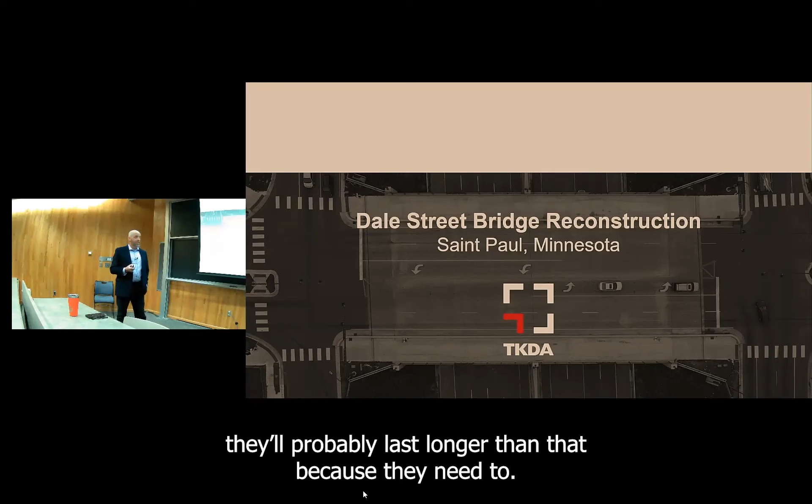St. Paul was my stomping grounds when I was a kid, running around in my youth, and you would learn about the Rondo neighborhood and the story of what happened there. To be honest, when this project came across my desk, it piqued my interest because this is where I call home. One of the things I really like about transportation projects is that you get to leave your fingerprint on your community for longer than you're going to be around. The bridges have a design life of 75 years, though they'll probably last longer because they need to. I was really interested in this, not only because this is where I grew up, but because Rondo has such importance in St. Paul, largely due to the community there that kept the story in the news. But to be honest, what I thought I knew at the time I started the project was not at all the full story.

This project was really devised by Ramsey County, who was the lead. To be frank, we've all driven down 94—they're all tight diamond interchanges. The ramps are really tight to the bridges, and a lot of them functionally don't operate very well. This was a major one the county wanted to replace. So the bridge was fine, but functionally it didn't work very well. Ramsey County led the project, and obviously since it's in St. Paul, they'd be involved, and MnDOT would be involved as they're actually the owner of the bridge.

Of course, we had to deal with the neighborhood groups—there's two of them, Rondo Avenue Inc. and Summit University. Blue Cross Blue Shield was involved; they donated some time and money to the project. And then Springboard for the Arts, which is a nonprofit for artists—I'll get into why they ended up being part of the project.

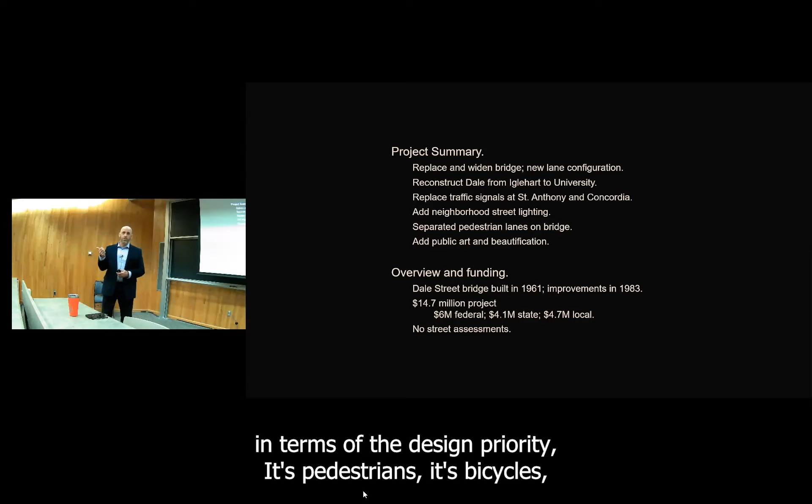Like I said, the scope of the project was really just to make that crossing and the signals more functional. That was originally the intent—you'd add some lighting—but in the end, what we ended up doing was really try to create a better environment for pedestrians and also for mass transit and things like that. When the county looks at their priorities for what they're going to design to, it's pedestrians, then bicycles, then mass transit, then vehicles, and then freight traffic, basically trucks. So as such, we needed to improve the pedestrian environment here.

So what's really unique about this project—when we got into it, I won the job with the county; they put the RFP out in September of '15, we proposed on it, and we were successful in winning the job.

And so then we got into starting off the public engagement part. This part of a project, public engagement, has changed drastically over my career, even from when the original bridge was constructed. In a way, when it started, it was not so much check a box, but you'd have your project and then a couple meetings. You'd get a church basement or a community center, put a layout up, some poster boards, and folks would come in and give you comments.

Then you would take those into consideration, and you'd do it a couple times. You'd do it initially when the project was starting, just to get some initial feedback. You would then come back later, once you've gotten that feedback, and put some layouts together, multiple, and get feedback on that. Ultimately you'd present, on the third one, what you were going to do in the project. In the first one, we did just that - we went in and put a layout of a concept down, and I'll show you in a bit what that looked like.

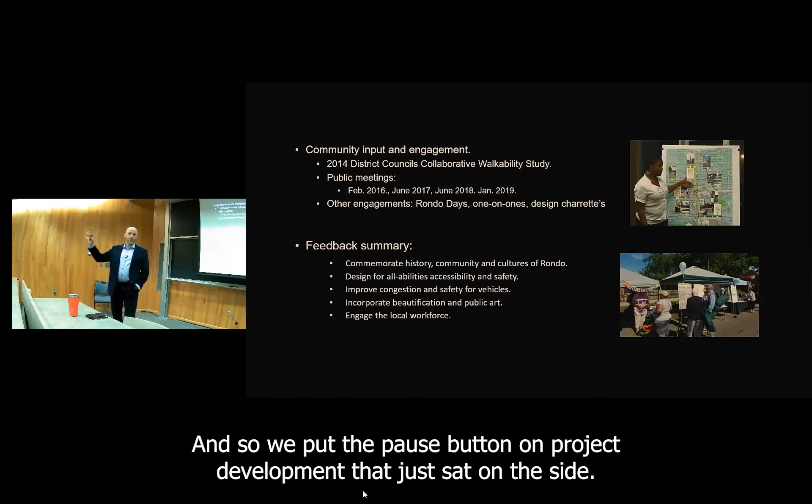But the feedback we got pretty quickly was, you need to slow way down. We're not ready to even start talking about options here. We need to just start talking. That was an eye-opener for us. So we put the pause button on project development - that just sat on the side. You can kind of see some dates there: '16, '17, '18, '19, we had open houses.

We would start going to Rondo Days, which is a big community event in the neighborhood there. And then we'd do one-on-ones - we'd go meet at people's houses, like a smaller neighborhood group, for a street or something. We'd go into their house and just start talking.

And then eventually what we started doing was design charrettes. What do you want to see? What elements or features of this project are you most interested in seeing? Some of that is really difficult for someone to express, because we're transportation professionals - we kind of know all the various things you can do reasonably. But they may not be as familiar, though they know kind of what they'd want to see.

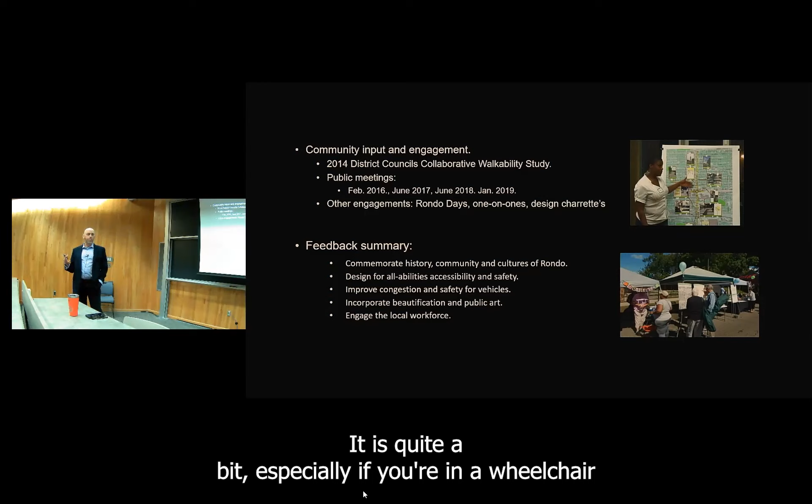That bridge that was there had multiple lanes, and like I said, it was a tight diamond - really tight. We've all been in intersections like this where people run the reds or just kind of keep flowing through. There's call it a hill, but because of the way the grade crossing was, there was a steep grade down to the north as Dale went north, actually a bit above 8%. If you're familiar with ADA requirements, the max grade is 5%. You think 3 to 5 to 8, that's a 3% delta - that's not that much. It is quite a bit though, especially if you're in a wheelchair, or if you're older and trying to negotiate walking down a steep slope, especially in the winter.

So when we started having these meetings, we got a lot of this feedback: we want a better pedestrian crossing, we want it to be more open. The current bridge had 5-foot sidewalks. It was built at the dawn of the interstate, and back then it was really a utility - you need to get across the bridge, 5 feet's enough, good for everyone, right?

And so they wanted a wider sidewalk, but sidewalks at the time when we started this project, the biggest we'd ever build would be 12 feet. That kind of came around when I started my career in the 2000s, and that was a big deal to go from 8 to 12 feet. They wanted bigger than 12.

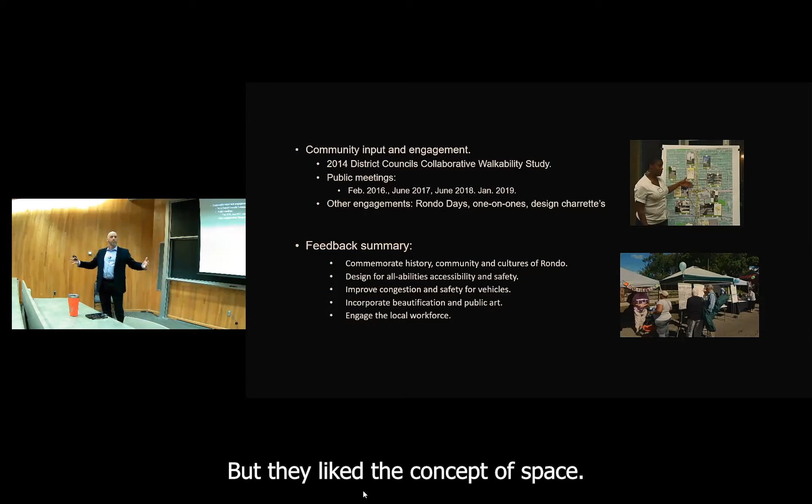Oh, okay. And I think we've all heard of the lid that they're talking about. They brought that up, but everyone recognizes that didn't fit within this project. That was something else, but they liked the concept of space. So that was one of the things.

So you can see kind of the feedback summary here. And one of the things that came out too was they wanted something unique about the bridge. They couldn't put their finger on it, but essentially somehow draw our neighborhood into the aesthetics of the bridge, our history into the aesthetic of the bridge. I'm a bridge engineer.

I'm not an artist. I don't have that sort of creative mind. All of the folks I was working with at the county are engineers too. So we put a lot of thought into that.

What we ended up doing was reaching out to an organization that works with artists. They're a nonprofit that needs some seed funding, but they can connect artists with projects, whether transportation, industrial, or something like Ecolab looking to do something with their space. It's just something to help get artists into some field of work.

So what we did is we worked with Springboard for the Arts, and we interviewed 12 different artists. St. Paul put in $10,000, Ramsey County put in $10,000, and Blue Cross Blue Shield put in $10,000 too. So we had $30,000 that we could use to hire some artists.

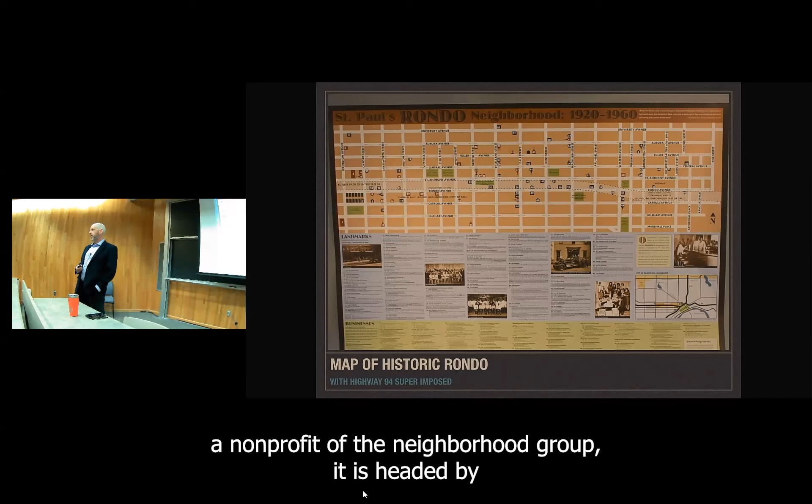Rondo Inc is an organization, a nonprofit of the neighborhood group. It's headed by Marvin Anderson. His childhood neighborhood here was before Interstate 94. He had this poster at a lot of our engagement meetings, and what this shows is where 94 went through the neighborhood.

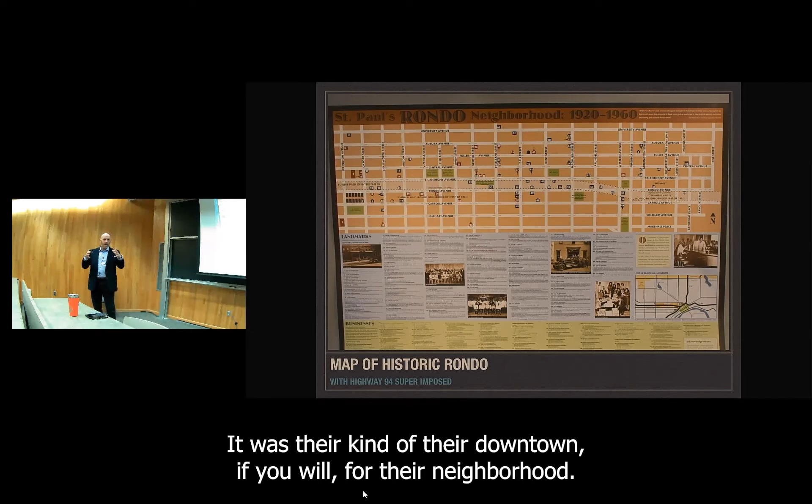You can see by the lighter line where it went through, and how the neighborhood was before. What's significant about Rondo is that these interstates went through a lot of different neighborhoods. What it did when it went through Dale is Dale was the center of the African-American neighborhood in Rondo. It was kind of their downtown, if you will, for their neighborhood. They had some shops there, they had some gathering places there, and this project really bisected that whole thing, kind of wiped it all away.

For those that don't know, 94 had two corridor options. Obviously the one they built on, but the other was more up by Energy Park Drive, which was more commercial, industrial, with different economic value in the minds of those that made the decision. But 94 went right through the neighborhood.

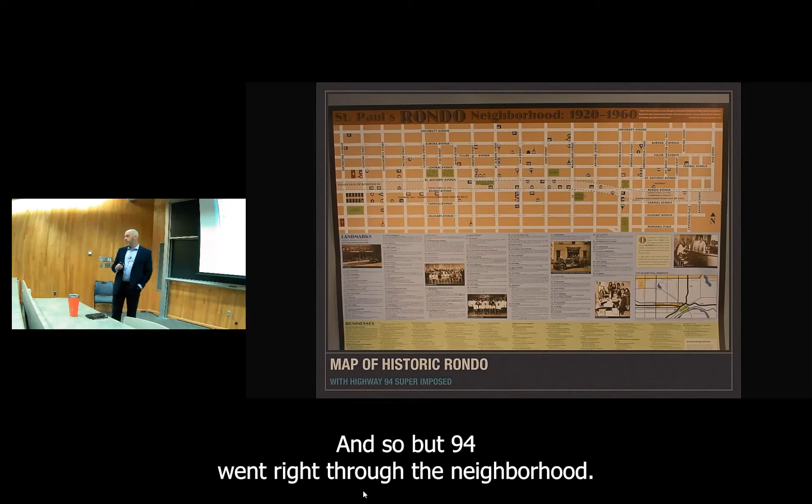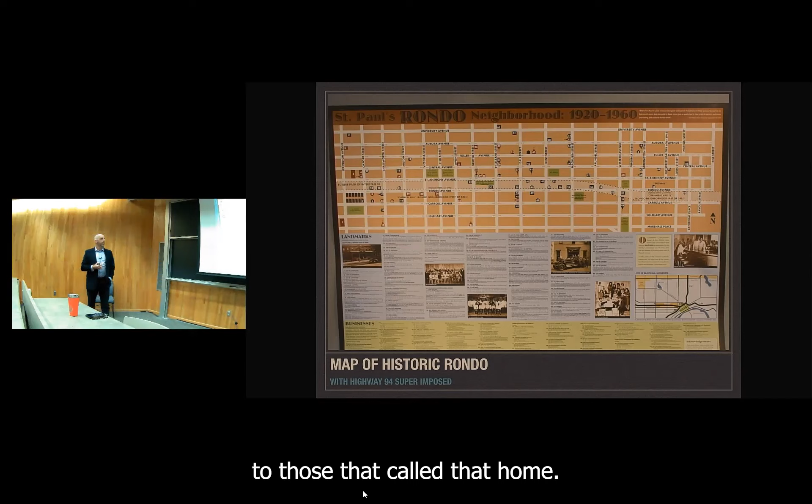If you take a look at what this map is, it's a grid of a neighborhood, and 94 went through it. This was pretty significant. If you took the time to talk to Marvin about it, read all these different points he has identified, you get a better vision of what happened and how deeply hurtful it was to those that called that home.

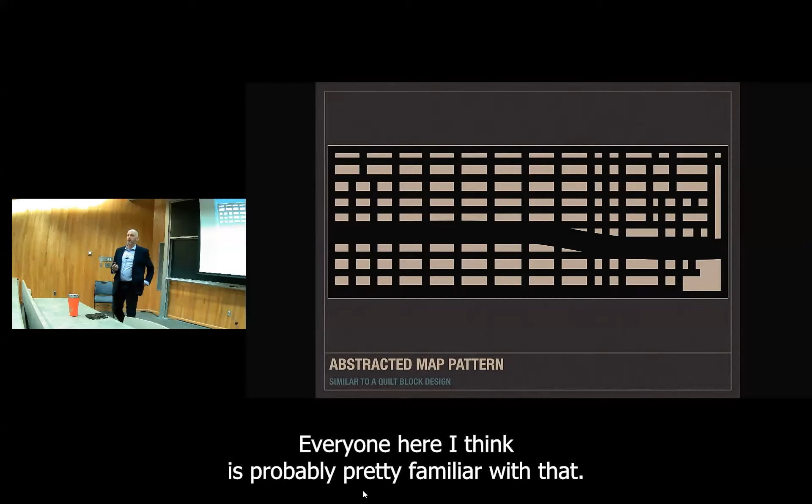We went and talked to a formliner supplier and brought this image in. You can't do a formliner where you have individual squares. What they were looking for was a 3D nature to this, where either the streets were inset or the neighborhood blocks were inset. But somehow, if this was 0, this would be -1 inch type thing.

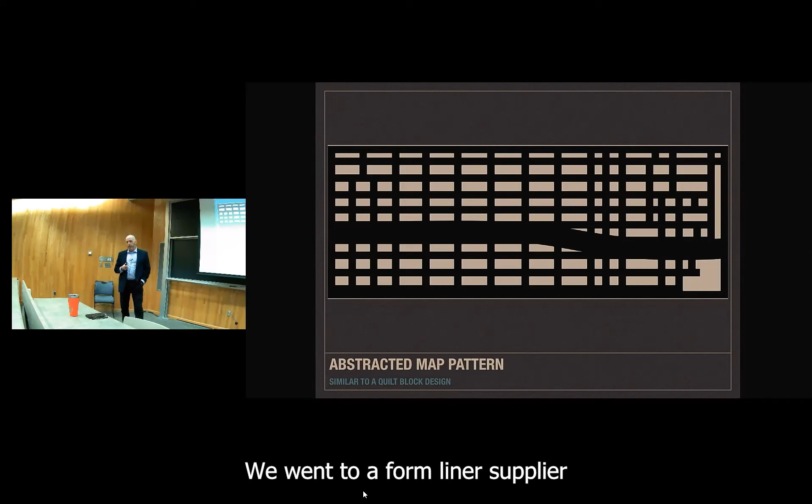We went to a formliner supplier down on West 7th Street in St. Paul and talked it through. There's a way that they could make this out of a plastic-like material with a CNC machine. That seemed pretty reasonable. So what we did with this is we nailed it to the inside forms of the abutment, the end of the bridge. There's a large face of concrete there.

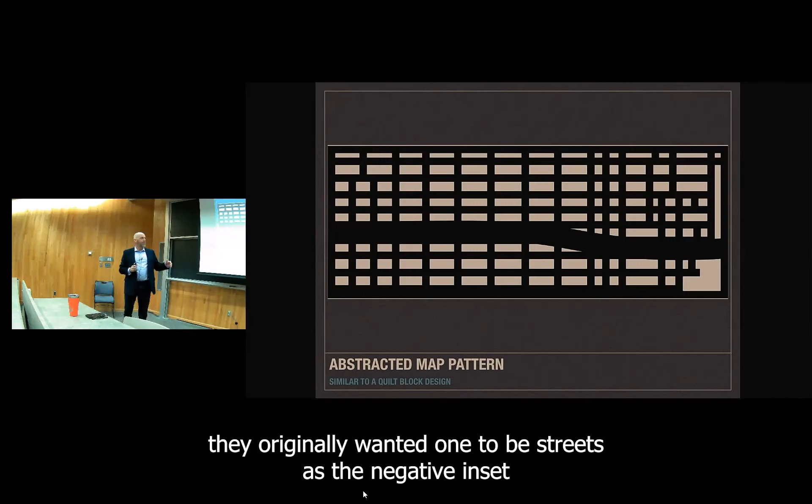So what you see when you go through there now is this on the face of the abutment. They originally wanted one to be streets as the negative inset, and then on the other abutment, streets be the outset. The idea there was that they could come together and lock together.

Cost-wise, couldn't do that. And the artists were incredibly good because they had these ideas. I had to get it into a form that was one, constructible, and two, economic, and three, you can't call it art because federal money can't pay for art. So it had to really be aesthetics.

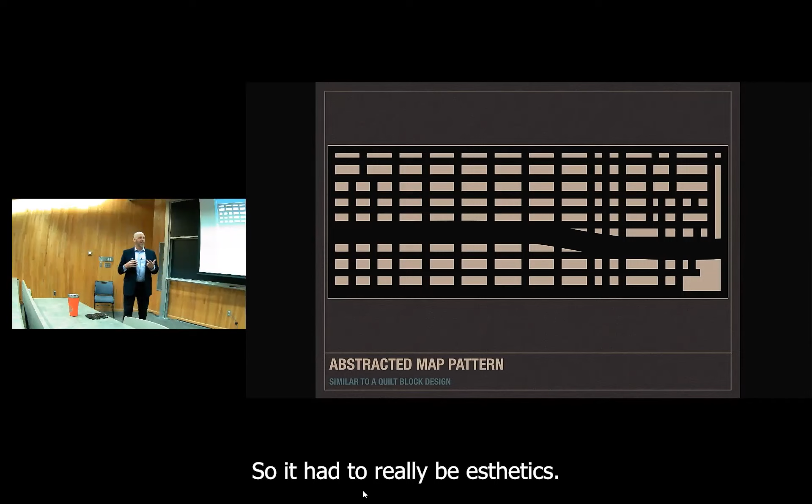So at any rate, to save on money, we made one form and we reused it everywhere.

When we were done with the job and doing the grand opening, some neighborhood folks were there and they were looking at it and they're like, is that the map of the neighborhood? And I said, yes, it is. So, bringing these elements into it. This is our neighborhood. Yes, 94 went through it, but this is our crossing was kind of the emphasis there.

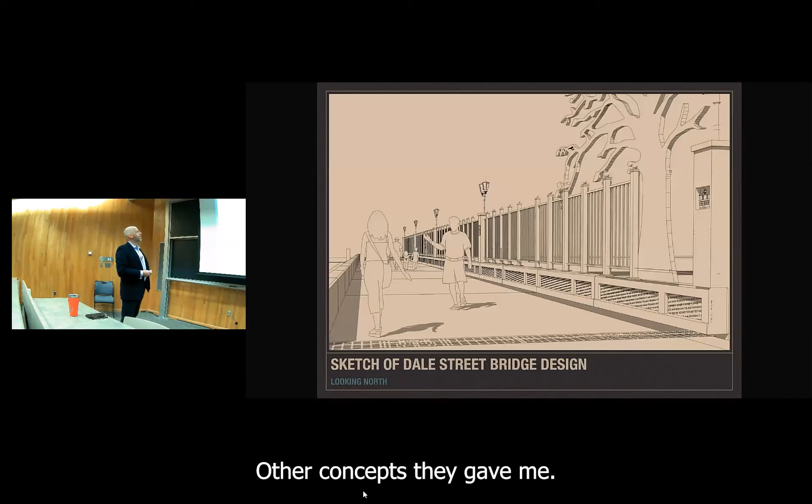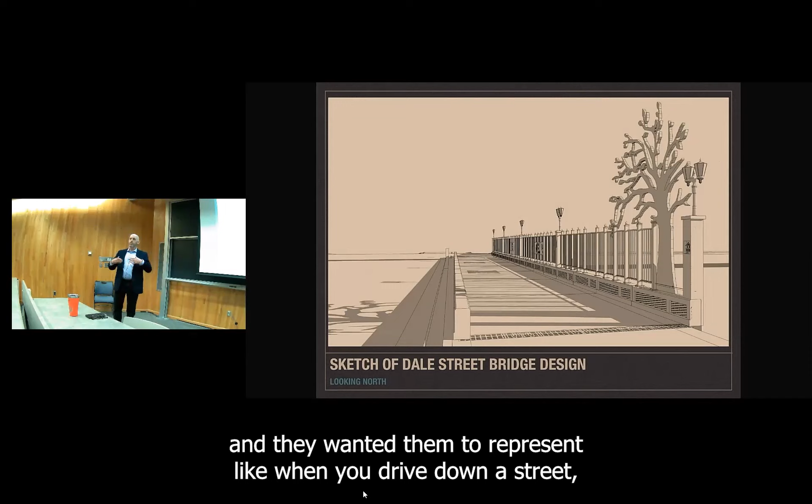What they wanted with the tree, they wanted metal trees, and they wanted them to represent like when you drive down a street in a neighborhood, there's a canopy of trees. They wanted to artistically give the impression of 94 having the canopy of trees over it, again bringing the two sides back together.

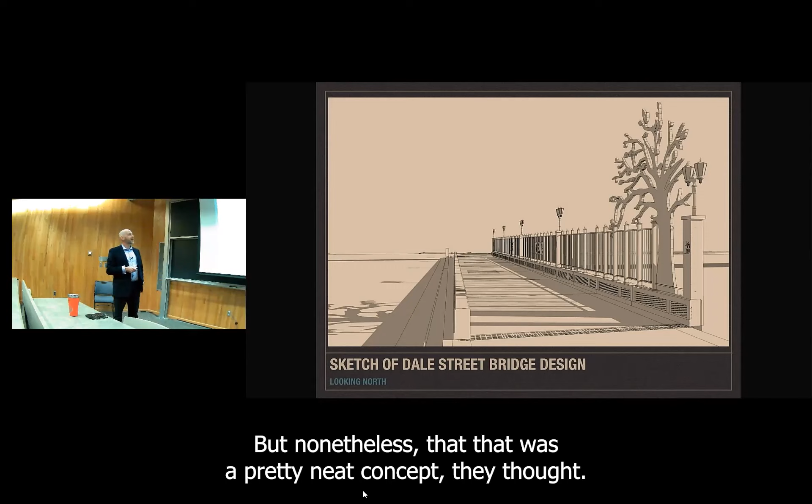I said, how tall are we thinking for these trees? And they said 40 feet. And I said, well, we got to scale that down a little bit. So eventually we landed on around 18, 20 feet, which I said, well, why don't we go for the height of a street light and then figure out from there. I still didn't know what we were going to do to make that happen, but nonetheless, that was a pretty neat concept, they thought.

And so they were giving me these ideas here. Here's another look at it when we put it into CAD. But one, how do we do this? How do we pay for it? And how do I try and make it constructible? That was a big part of the work we had to do.

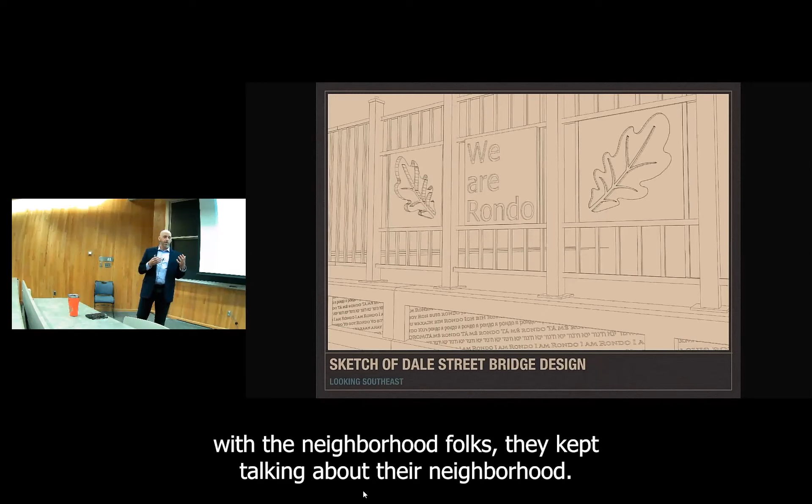Another thing that they wanted to do is We Are Rondo. When they were doing that engagement with the neighborhood folks, they kept talking about their neighborhood. We are Rondo. This is our neighborhood. You can put a freeway through it, but it's still ours. And so they wanted somehow We Are Rondo into the railing.

When we were looking at that, you initially look at it and go, well, if that's going to be cut out of steel, the E's don't work, the A doesn't work, the O doesn't work, right? So that was the challenge there, how do I do this. And then they wanted to do these leaves, oak leaves, again with the trees, making it as if the rebirth of the area, right?

So if you look at that from a constructability point of view, we have some challenges on how that would work. You could see a kid coming up and just pulling on that and bending that piece of metal out, and then we got a problem. But that's the concept I have to work with.

Down here, I have another slide for this later, but what that is, We Are Rondo, I Am Rondo, written in 13 different languages. And the 13 different languages represent the 13 different ethnic groups that call Rondo home right now. So that's pretty cool, I like that idea. Probably could do something with Formliner and CNC to make that happen. Not entirely sure, could get expensive, but I like the idea of it.

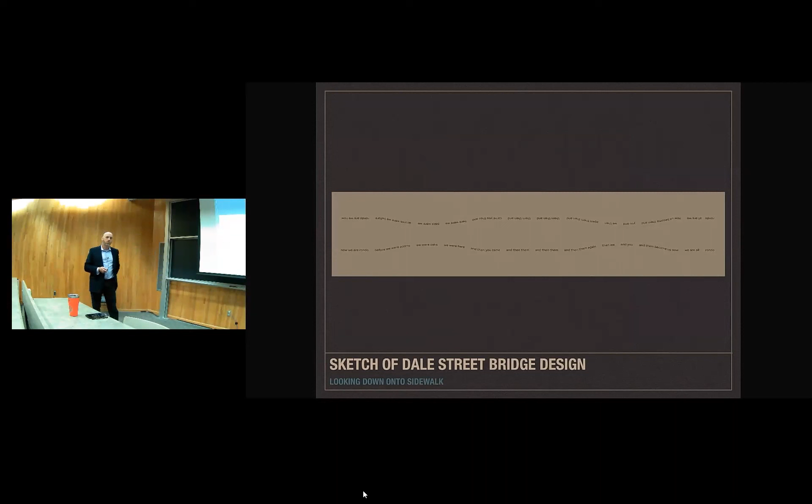One of the artists is a poet, and she wanted to write a poem that would get placed into the sidewalk of the bridge. The way she wrote the poem was that depending on what direction you were walking, you could read the poem from both directions, and it kind of had a different meaning. So literally this poem right here is the inverse of that one right there. An incredibly cool idea. As I'm sure a lot of folks here know, MnDOT is particularly sensitive about their bridge decks and putting any sort of imperfection into it, and that impacting the life of the bridge. But nonetheless, okay, we'll see what we can do with this and where we can put it. But I thought it was a pretty interesting idea.

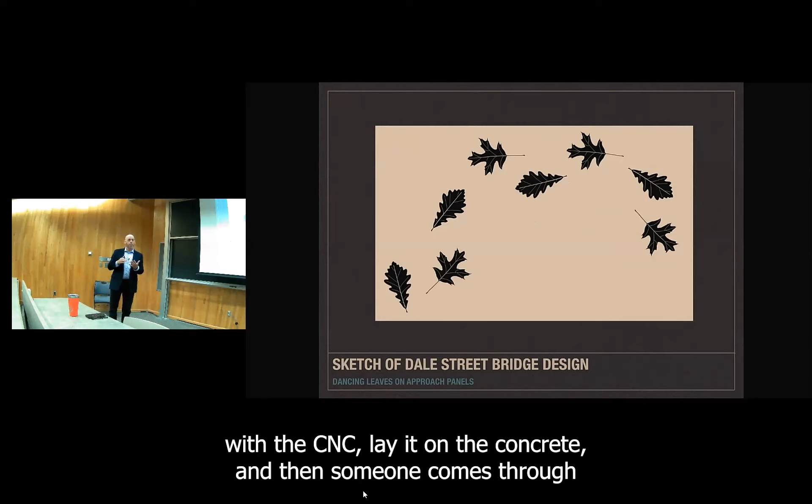These right here, and including the poem, there's a lot of detail here, right? Like they got the spine of the leaf with kind of the veins of the leaf going out. Obviously couldn't do any of that, but we did the outside image. What we ended up doing is 3M has this product that you can cut out with a CNC, lay it on the concrete, and then someone comes through with a sandblast and blasts it into the concrete.

Obviously, that's a one-time opportunity if you're sandblasting. So we had some panels poured off to the side that we were going to demo later. But we laid these out, and the laborers... I'll back up really quickly. This project was incredibly rewarding to work on for a number of different people, the laborers included. It was different, unique work, for the same reasons I love transportation projects. They liked this as well.

And so they sandblasted it. They spent time trying to make sure they were doing it right, but the form is only good one time. So they had rolls of this stuff for doing these leaves. Had to figure it out. And so in the approach panels, which is the concrete segment of pavement prior to the actual bridge, in the sidewalk area, are the leaves doing the Lindy Hop.

And then for the poem on the bridge deck, this was a pretty neat experience. MnDOT's incredibly sensitive about their bridge decks. They don't last very long, our environment is really tough on them, so we want to keep them as pristine as possible. When I was talking to the bridge office about putting a poem on the bridge deck and sandblasting it, they were remarkably good to work with on that.

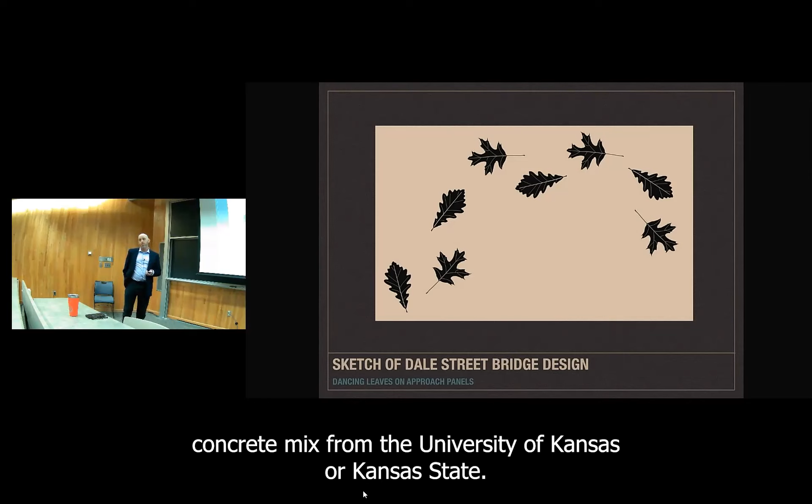What we ended up doing is using an internal cure concrete mix. The University of Kansas or Kansas State, I don't know which one, was working with MnDOT a lot on this mix, and MnDOT had used it on two projects before, one where it went well, one where it didn't go as well. But they wanted to give it another try. They felt the mix would deliver the resilience of the deck they were looking for, yet allow us to do the sandblasting.

As many of you know, we put a lot of fibers in concrete now, and they do an amazing job producing a great bridge deck, but they're fuzzy when done. You get all the fibers, those wear off, but that wouldn't allow sandblasting, it would interfere. So we did this internal cure mix instead.

I was involved during construction as the construction administrator, and we brought up the folks at the university who were working on the mix. We did a pre-pour and talked about all the different variables. It's a very sensitive mix - you can't just add water like a lot of contractors like to do to make it easier to work with.

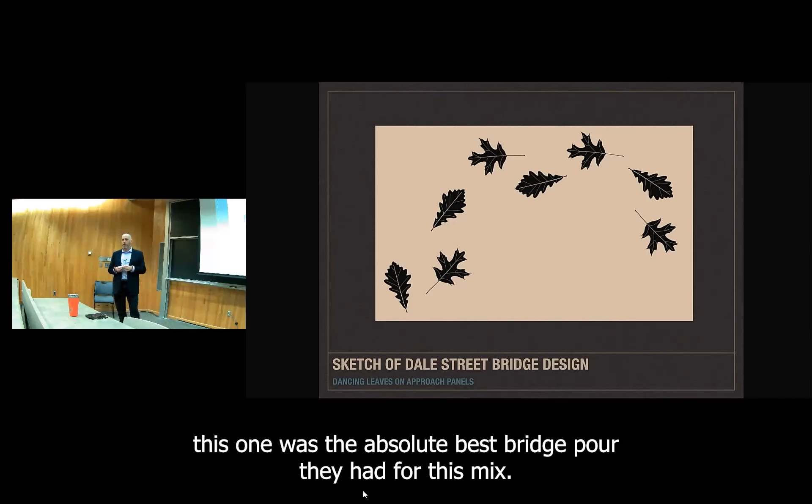And we had to do the bridge construction in stages, half at a time. It turned out fantastic. Of the three MnDOT had done to date, this was the absolute best bridge deck pour they had for this mix. So that was one thing MnDOT brought to the table that we worked with them on.

But as far as the poem goes, same thing. We had a really wide sidewalk, and the letters on the text were about one foot tall. We laid it all out onto the bridge deck, and basically the laborers got a one-time shot at it. That was it, there's no more. And it turned out remarkably well.

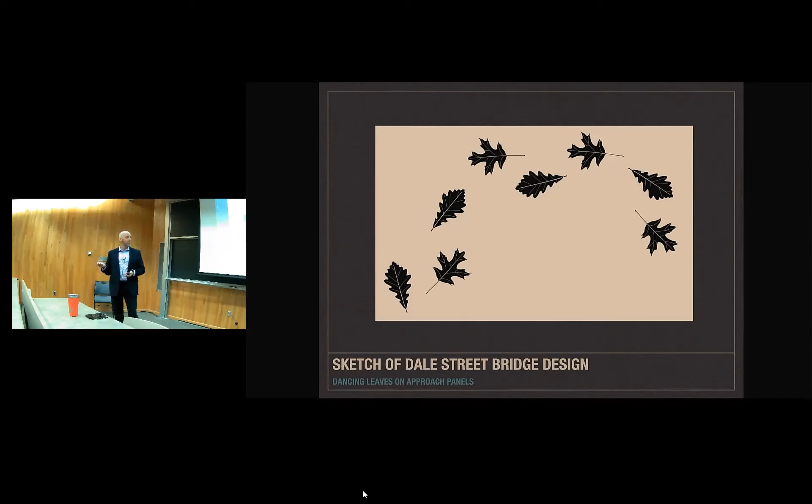For the leaves, we created in our office basically 3D renderings of it, the face of it, two inches deep. In the plans, we put a note that the CAD file for that would be available to the contractor during construction. They took that, gave it to a supplier, and out of high-density styrofoam they created the inverse of it, which got set into the form. I'll get into the trees a little bit on how I pulled that off and some of the other attributes.

But nonetheless, for like a year we spent a lot of time going back and forth, and we did community engagement meetings along the way. That proved to be enormously successful. Pulling the community in via the artists, making sure they had a voice into what this project looked like, was fundamentally key to the success of the job.

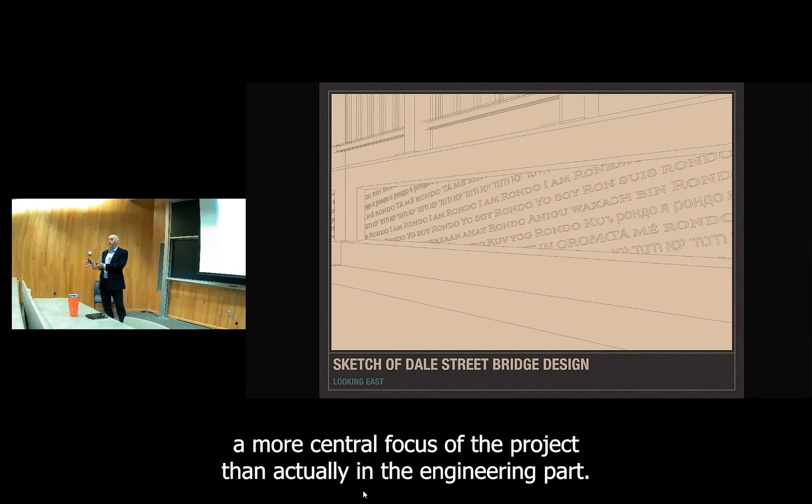And when you're delivering a transportation project now, especially in an urban area, that part of the project delivery is rapidly changing and becoming a more central focus of the project than the engineering part. A two-span pre-stressed beam bridge is no big deal, we do these all the time. It's bread and butter - the roadway design and all that largely follows AASHTO guidelines. So the engineering part of a project like this is pretty simple, straightforward.

It's how you engage the community, how you go out to get their trust, and how you bring what they want into the project, yet still make it constructible and within a level of budget. That part is going to become more and more dominant in projects.

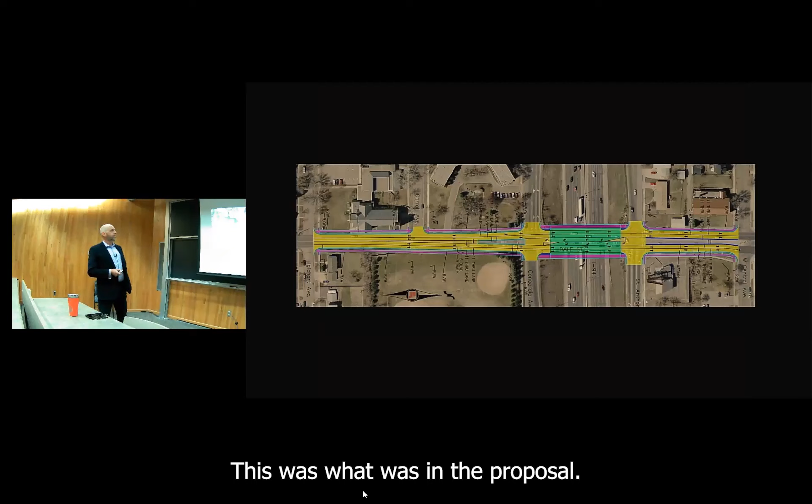So a little bit about the project scope. This was what was in the proposal. When you send something out to engineers for a proposal, you got to give them something to put a number to. It's a little longer than you might think, but the sole focus was replacing the bridge and adding a turn lane. There was width in the median to the north, so that didn't need to go very far, but we had to widen out to the south to make room for that. So that's essentially the whole reason why the project is what it is. It's replace the bridge, add a turn lane, tie it in as quick as possible.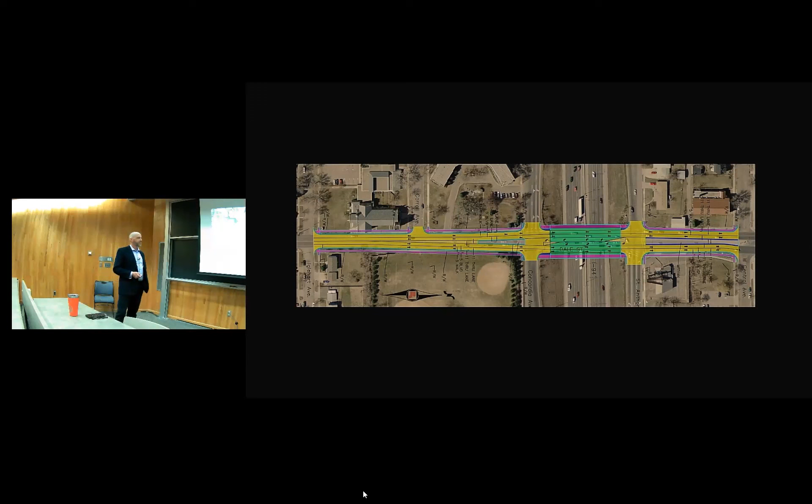We started doing community engagement meetings. And one of the things that we did too, when we did the engagement, is they'd say, we want a better pedestrian crossing. We don't like being mixed in with traffic. Fair. They see all sorts of crossings where pedestrians are separated, and that is attractive.

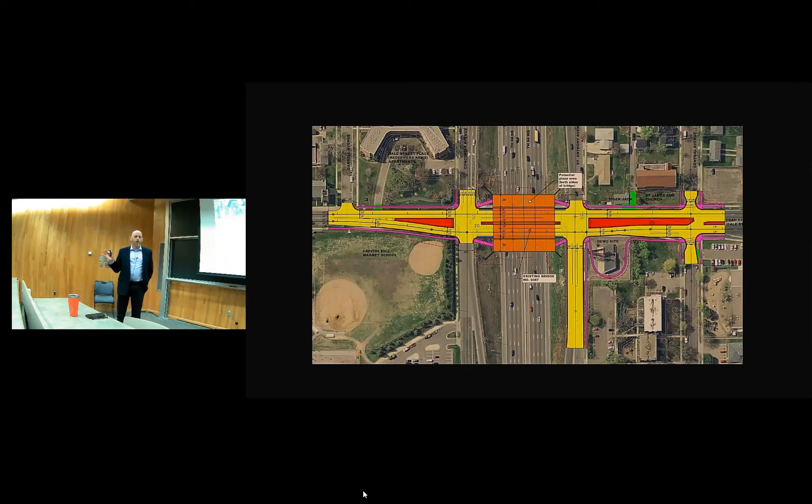One of the things we did in a community engagement meeting was in the basement of a church. I spent the whole night doing it. We went down each of those paths with them. They said, I want to separate the pedestrians from the traffic.

Okay, for this crossing, what does that look like? We brought drawings in and showed them how the pedestrians would have to be in a bridge up and over the other bridge and how they would tie in. Or you could go underneath the frontage roads on each side with box culverts and a tunnel, and you got to get down to the tunnel. And we went through all that.

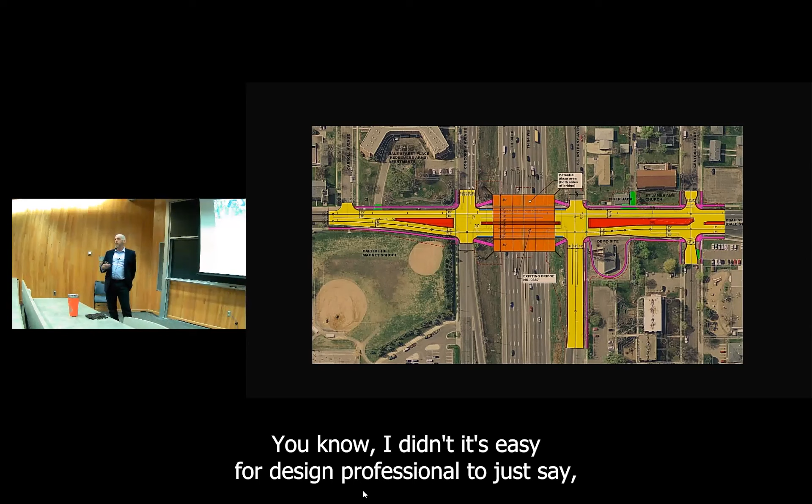It's easy for a design professional to just say that's not really all that possible, that's not practical. But they're not going to necessarily see it as simply as you do. To have them come to the same conclusion we did, we went down that road. And at the end of it, actually, Seitu Jones, who's a figure in the neighborhood and an artist in the transportation world, was quite appreciative of it because it did help bring everyone into the same conclusion.

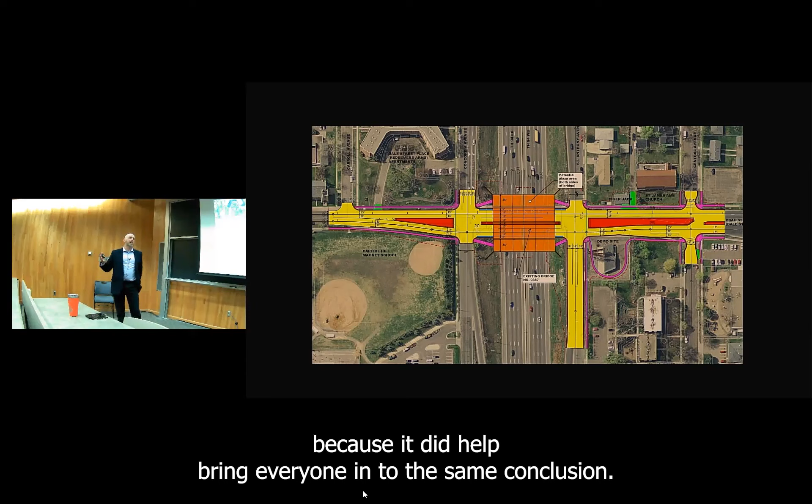Ultimately, what we wanted was the bridge that we were proposing, but way better pedestrian accommodations. Initially we thought, just throwing a number out there, it could be 30 feet wide for the pedestrian area. Obviously, that's not very cost effective. That's going to be really expensive and an enormously wide bridge. But we kept that going, and we pared through some different options.

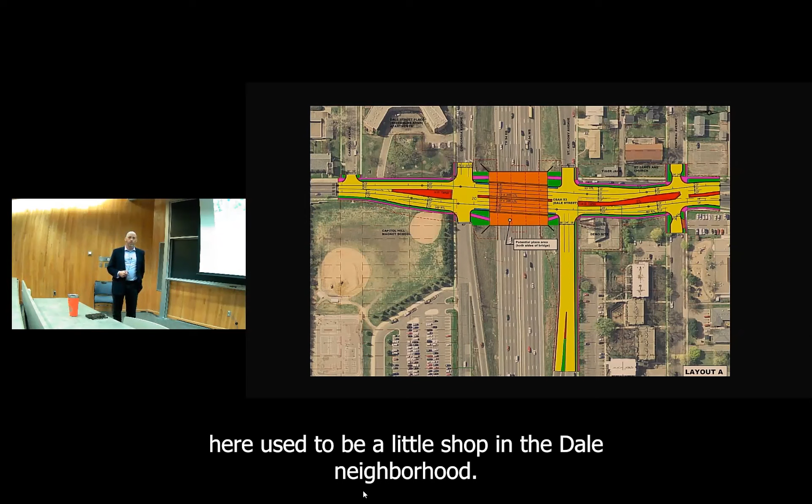Tiger Jack, I don't know if anyone knows the name. This, when my dad was a kid, this right here used to be a little shop in the Dale neighborhood. You can go in there and get candy as a kid, or a soda, some ice cream. The building that's there now is not the original. That's actually at the Minnesota Historical Society.

But nonetheless, we were trying to pull away from that building because as you can see right now, the sidewalk and roadway are basically right on it. We wanted to create some more space. So we were trying to look at changing the alignment a little bit, but still keeping the bridge wide. And then we're like, oh, well, the neighborhood would like better accommodations down here.

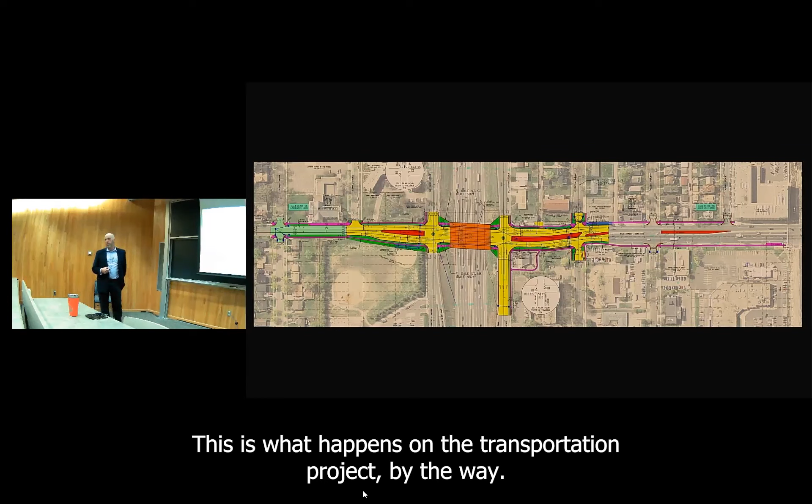This is what happens on a transportation project, by the way. You don't know where to start. It's easy to spend money when you're actually not spending it yet. But we want to make this better down here. And by the way, green's an overlay, yellow is a reconstruct. So we're just going to overlay this, kind of give it a new face.

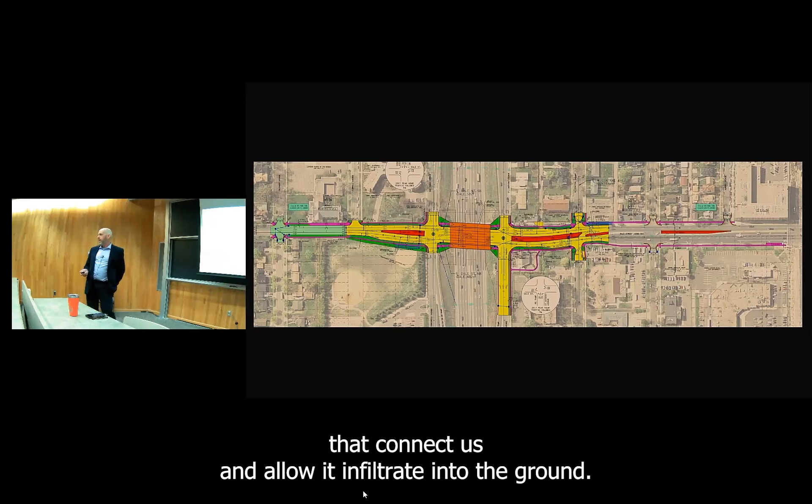And then you'll start seeing this type of stuff right here. Transportation projects nowadays, you have to treat stormwater. You can't just dump it into the river. You got to treat it, pull the solids out, try and make it as clean as possible when it goes on the river. So now we start talking no place for ponds. So large pipes underground that can act as a pond, allow it to infiltrate into the ground.

Meanwhile, we're still tying in as soon as we can on the north, but we're doing sidewalks to the north, making some improvements down that way. Oh, and then right here, we bought an old gasoline...

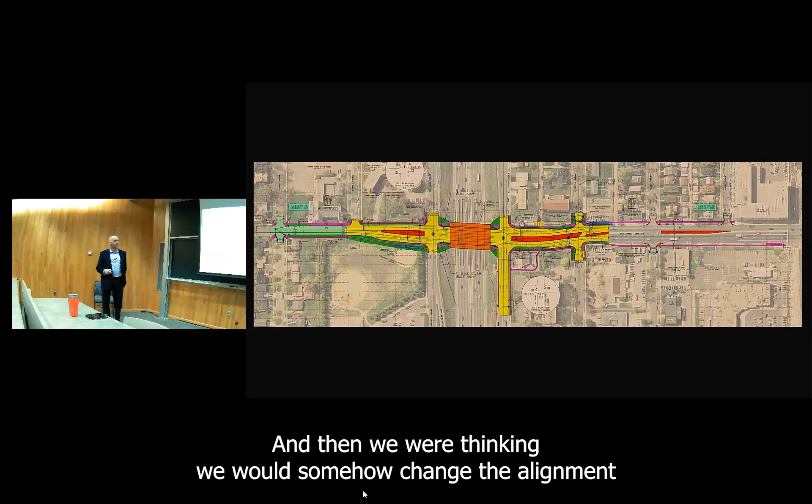There was a gasoline station there that had gone out of business, and the county saw an opportunity to buy that. We were thinking we would somehow change the alignment of the sidewalk to try and get it within ADA standards. That north side is a bit above 8% grade, and there's nothing you can really do about that. In fact, we had to increase the vertical clearance over the interstate - everything back in the day was 15 feet, now we're at 16.6, so that had to go up. It just made it worse.

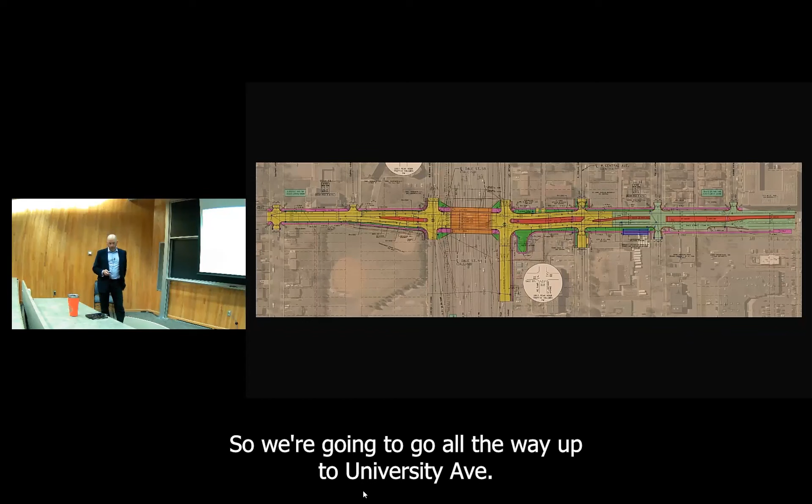Well, okay, we're going to overlay to the north here, and we've got to put this drainage system up over there. So we're going to go all the way up to University with an overlay. And then finally, heck, we're just going to rebuild the whole corridor.

For those students looking to get into transportation, this is pretty typical. The goal here, again, was PEDs first, bikes second, mass transit third, and then the others last. A lot of the things we did were done with that intention.

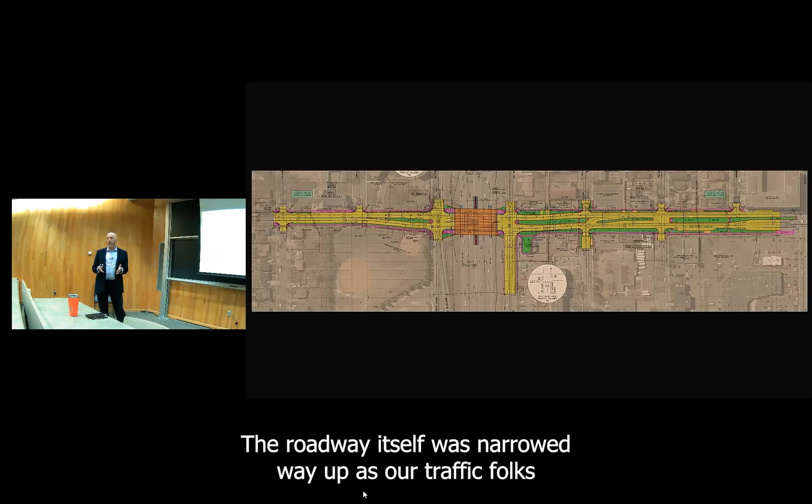Sidewalks were pulled well away from the roadway. The roadway itself was narrowed way up. As our traffic folks in the room know, when you make roadways not as wide, people drive not as fast - they don't feel as comfortable driving fast. So in more urban areas, you tighten that up and people don't feel like they can drive as fast.

We're going to add lots of green spaces - all the medians will have green spaces in them. And then again, we're still talking about that sidewalk to try and make it ADA compliant, pulling away from Tiger Jack's building right there.

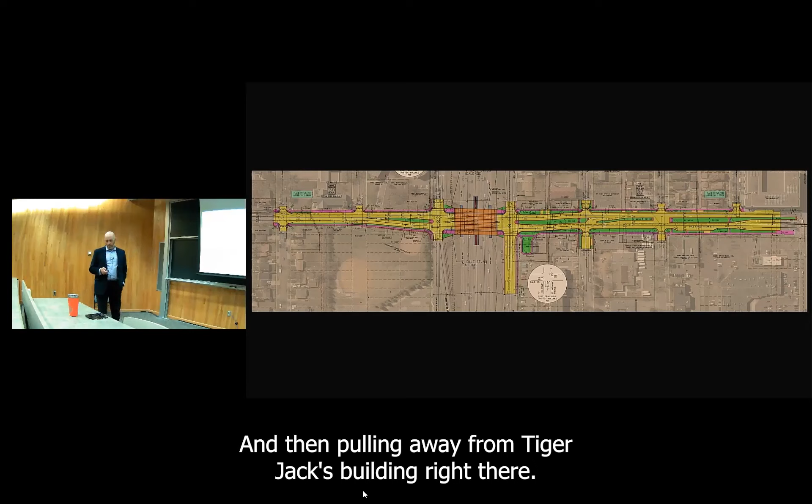One thing you'll notice, the sidewalks ended up being 16 feet. The evolution of sidewalks is interesting on its own. Back when they built the interstate, 5 feet was kind of the standard, non-barrier separated. Over time that became more like 8 feet, and then around 2000 it was 12 feet. Then we started barrier separating, putting a barrier between the pedestrians and the traffic, and up until this, 12 feet was kind of the standard.

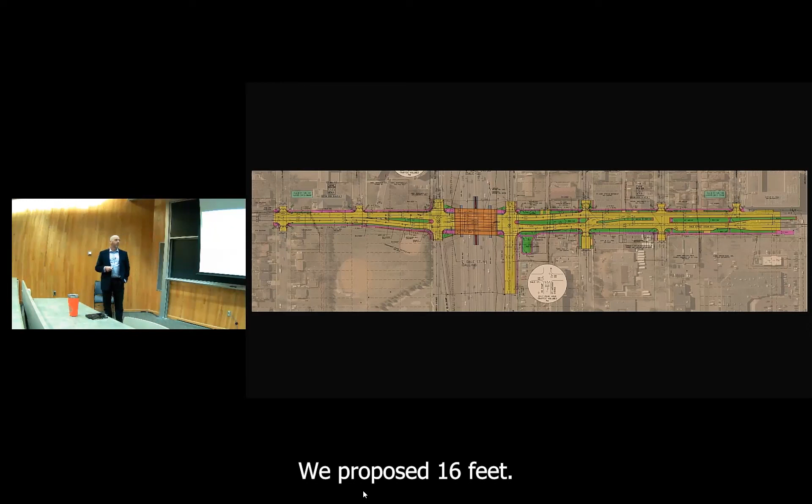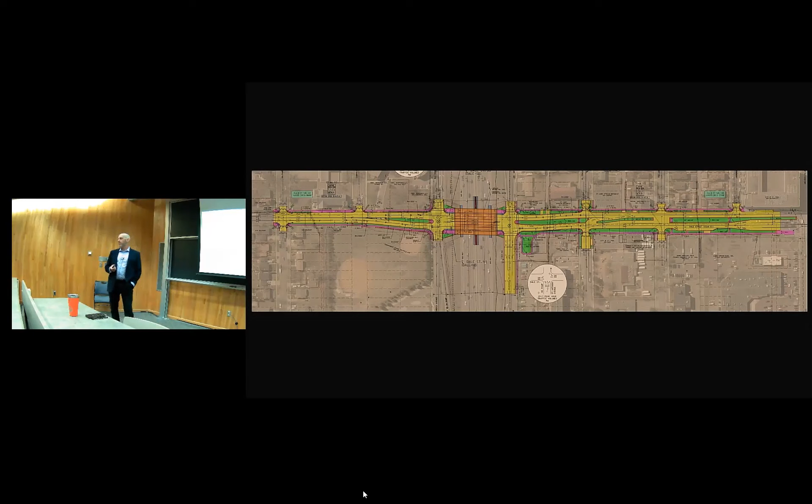We proposed 16 feet. That was a big deal to get through the DOT - they saw it as a precedent, which is true. Other communities would look at that and want that. And that's happened - the 494 design build project down on the south side through Bloomington has 3 bridges off to the east of 35W: Portland, Nicollet, and 12th. All of them have like 19-foot, 18-foot, 20-foot sidewalks. You're going to see more and more of that.

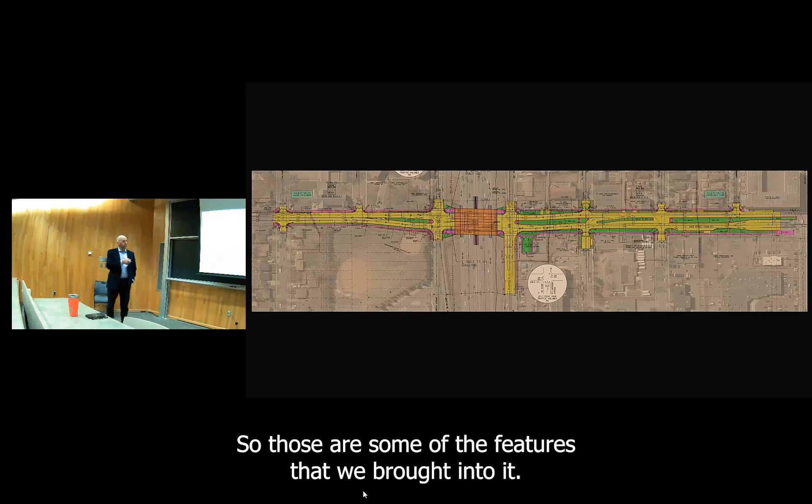The fact of the matter is, after we built this with the barrier separating it, it doesn't seem excessive - it's incredibly pleasant. If you had kids trying to cross from the south side of 94 to the north side, the signals have timing that allows for the PEDs to cross before any traffic starts to move. It's incredibly safe, it feels good, it is just better. So those are some of the features we brought into it.

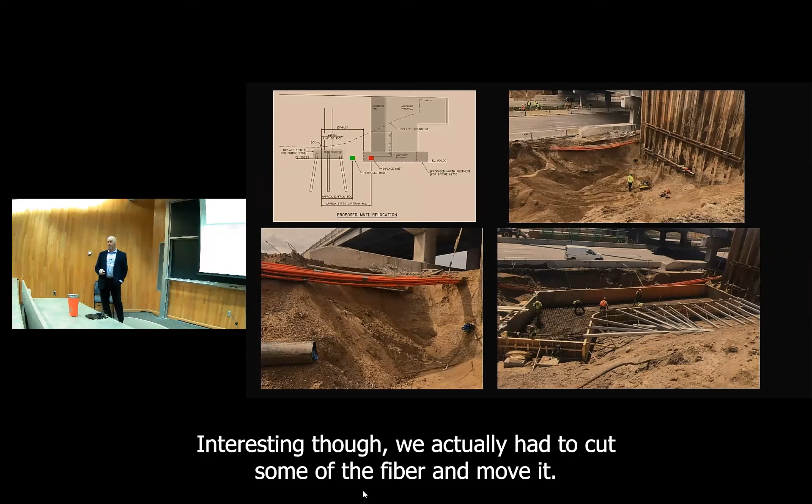I'll go through some construction stuff. 94 has an incredible amount of utilities, as you can imagine. It turns out that almost all of the internet in the cities goes through the north side of 94 - there are 20 different ducts that carry fiber optic for pretty much everyone. When we looked into it, this is where the duct was, and this is where I needed the duct to be, so we had to work around that. Interesting though, we actually had to cut some of the fiber and move it - we were told, thou shall not do that till after the Super Bowl.

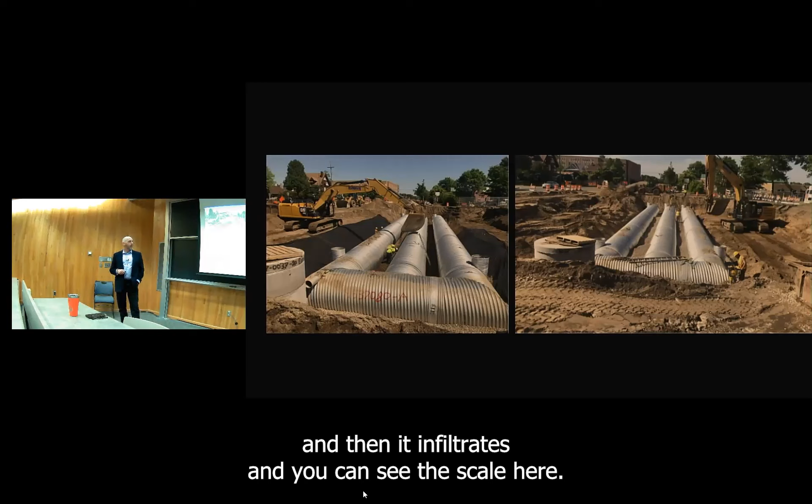Drainage infiltration in an urban area can be a big challenge. We have to treat stormwater, and the preference is to allow for infiltration - water going back into the ground to recharge the groundwater table. We don't have room for that in urban areas, so these are 84-inch pipes that are perforated to take on that large volume of water during a storm, and then it infiltrates. You can see the scale here - sorry, the picture is a little fuzzy, but nonetheless, very large.

When you do this, you have a geo company go out and do a boring, and they tell you what they think the infiltration rate will be. But before you're allowed to install it, you actually have to run a test. When we ran that test, it was super sandy, so the water basically just disappeared. It worked out great.

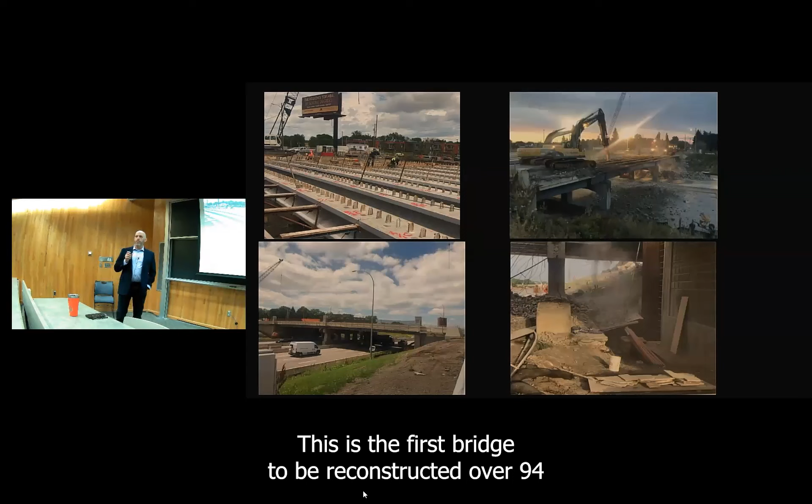Construction over 94 is a challenge. This is the first bridge to be reconstructed over 94 between Minneapolis and St. Paul, and this is a vital corridor for us.

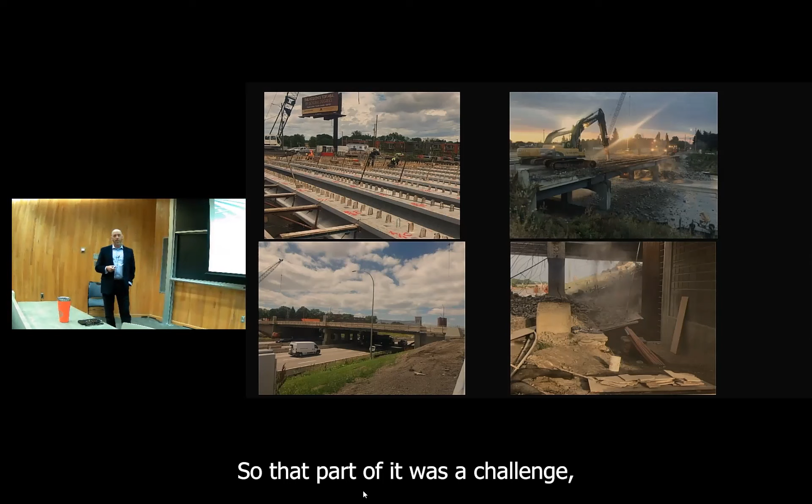We did build it in 2020, which was both helpful and non-helpful. That was the first year of COVID, so traffic was way down, but traffic was also incredibly fast. Being down in the pier area between directions of traffic wasn't entirely comfortable, even with barriers. Not having a lot of traffic made it easier to get lane closures, but we built the bridge in stages, one half and then the other, two halves in a year, which in Minnesota is challenging.

But we did manage to pull it off. This is the first bridge to be placed in St. Paul, or in this segment of 94.

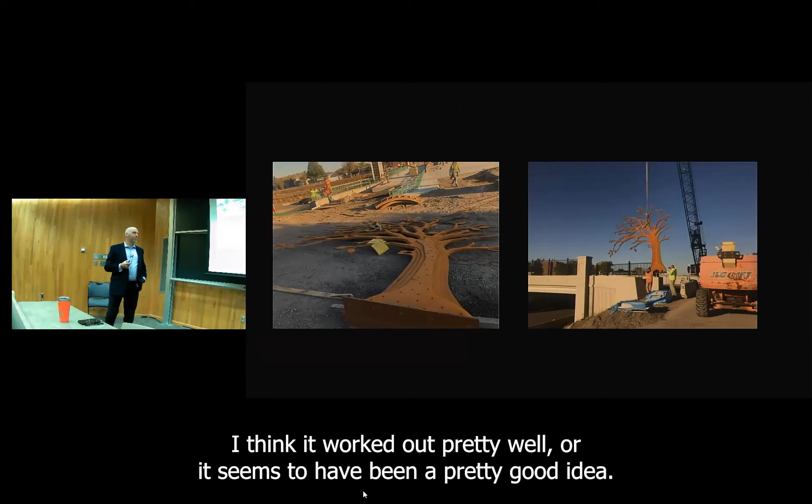Now, the trees. A couple things with the trees - I thought they were really neat. I got basically a shape of it; we want this tree 20 feet tall. I struggled with how to do it, and ultimately it worked out pretty well, or seems to have been a good idea. We went and met with a fabricator.

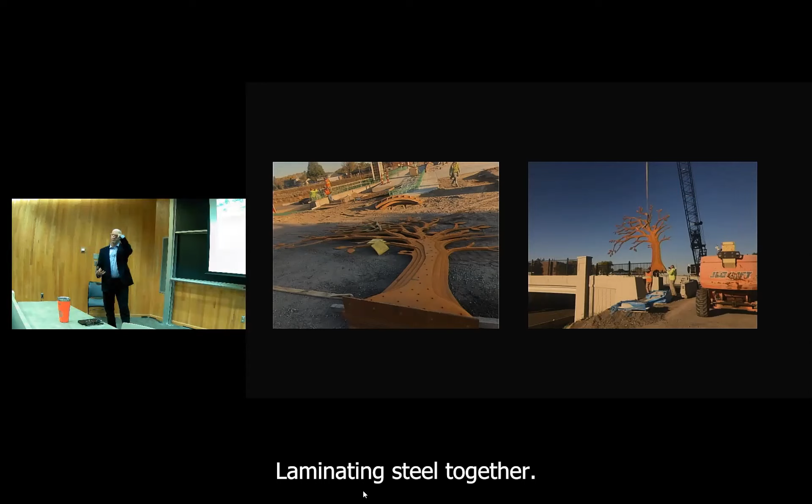Here's what we got. I had an idea of basically laminating steel to create the strength, but wasn't sure if it was entirely possible. So we met with a fabricator and laid out our thoughts. Essentially we wanted to create something they could cut with the CNC machine and then weld together in concept - laminating steel together. All in all, that works.

The steel that would work with the CNC machine, and being able to handle it, they wanted to work with 4x8 sheets. That works. And the other thing is, as many here know, when you weld steel you superheat it, and if it's not a big enough element, it's going to start to warp, which would be a challenge.

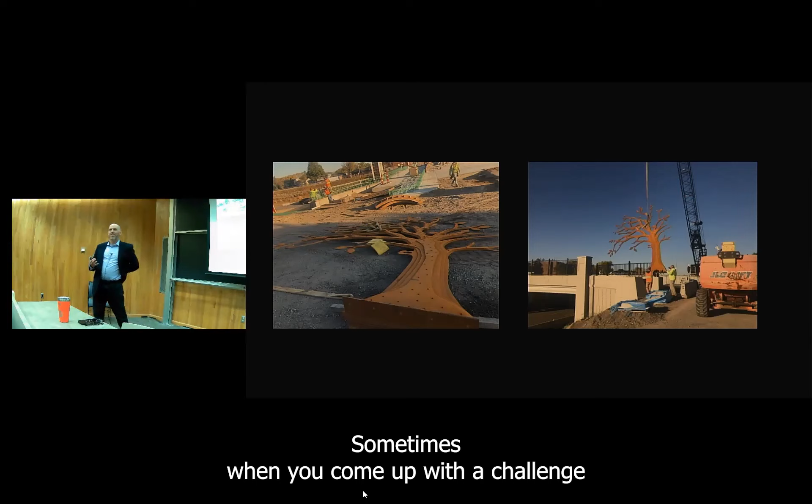So what we ended up doing, as you'll see in this picture, was obviously laminate the steel. Sometimes when you're up against a challenge on an engineering front, the solution you come up with is almost always obvious if it's good and relatively straightforward. So we laminated steel to help with the warping problem.

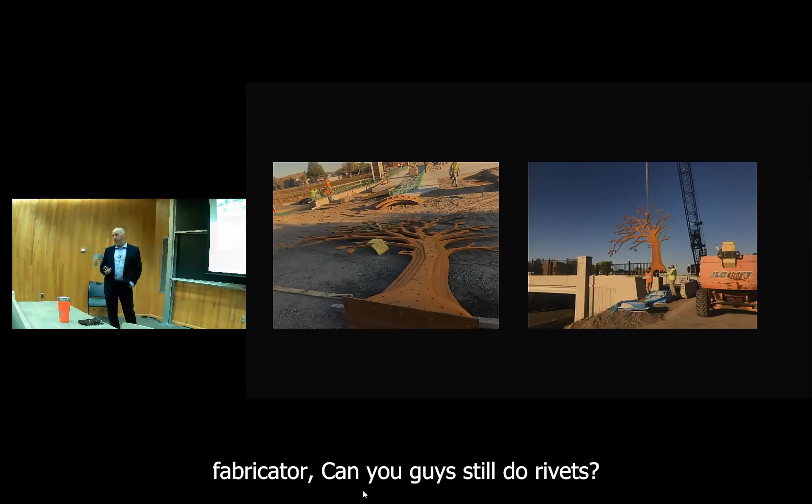We bolted it together, but one thing we didn't want to do with the bolting was create something someone could grab onto, like a hex bolt - you can grab onto the nut, it projects out, you can put your foot on it, you can grab onto it. So we asked the fabricator, 'Can you guys still do rivets?' And they said sure. Ultimately, that's what we ended up doing.

You have to pay for the steel you bought originally, even the part that gets cut out, so we went through about 20,000 pounds of steel per tree. When they did the riveting, they actually had to get someone in with history in it to reteach the whole crew on how to do it. In the end, we bought 20,000 pounds per tree, and they weigh about 6,000 pounds.

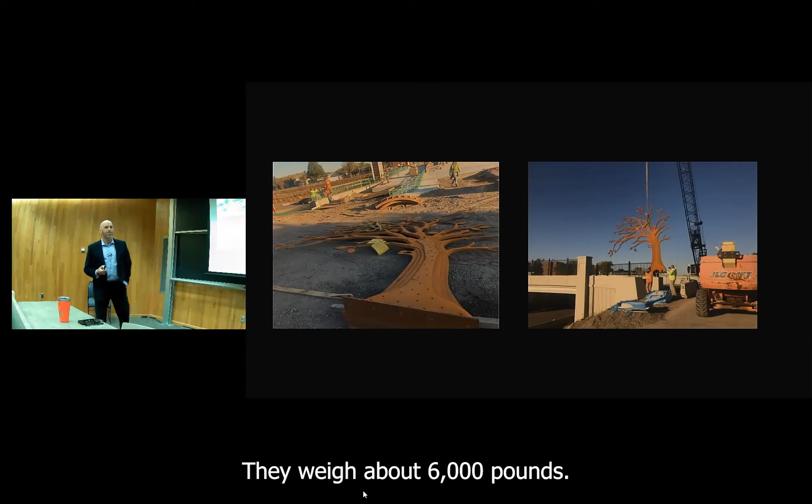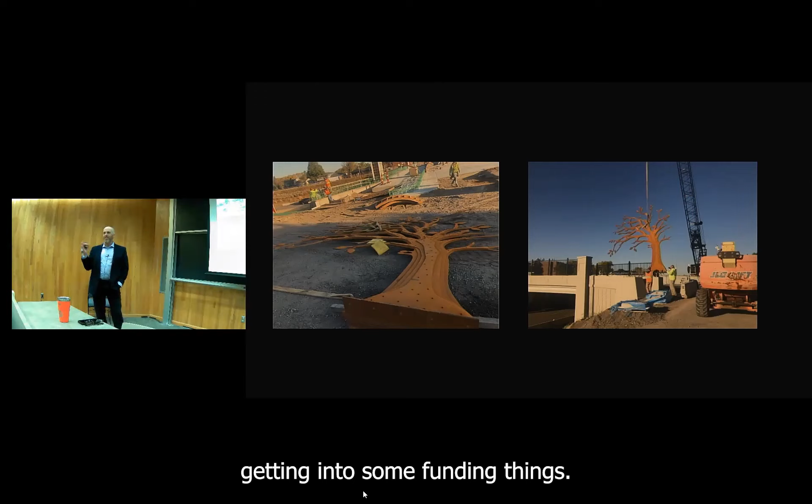We did not want... if you remember in the first photo with the tree, they wanted them on the bridge, going over it. One unfortunate thing with bridges is they're often a point where people go when they're at the end of themselves, so they didn't want the trees to become something people climbed up and dropped off of. So we pulled them off to the side, and getting into funding things, they didn't want it attached to the bridge because then it's part of the bridge plan. So we actually put in separate foundations, completely independent, so it's not part of the bridge.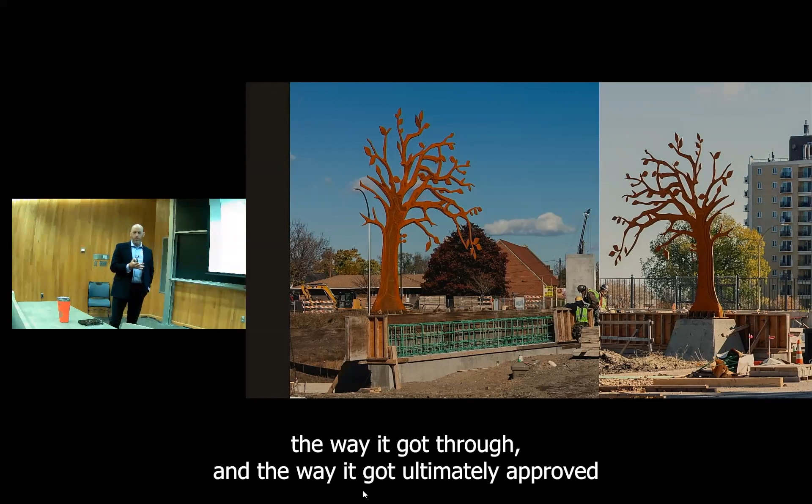Of all the things we did, this was arguably art - there's no way to say this is somehow just general aesthetics on a bridge. The way it got through and ultimately approved was in the environmental document, which is something we have to do now in transportation projects, largely because of the way the interstate was built.

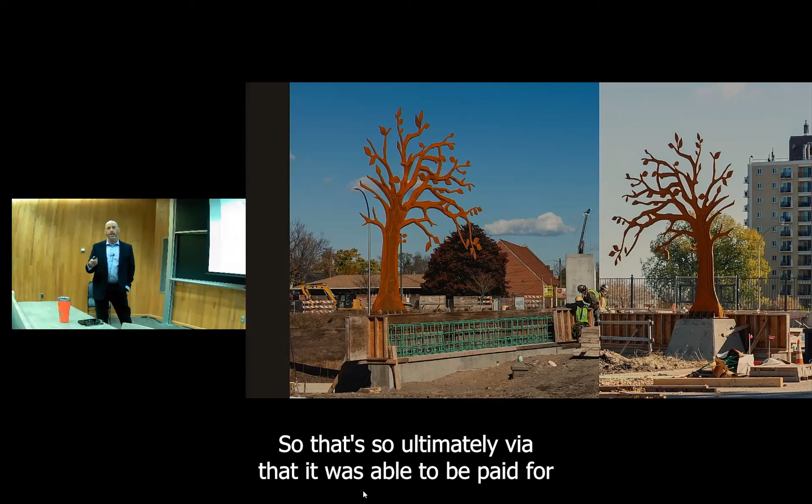There's a component to it, environmental justice. I'm not an expert on these documents, I'm not the author of this one, but essentially it acknowledged the missteps of our predecessors when they built the interstate, and this was an acknowledgement of trying to repair that mistake. Ultimately it was able to be paid for via federal funding.

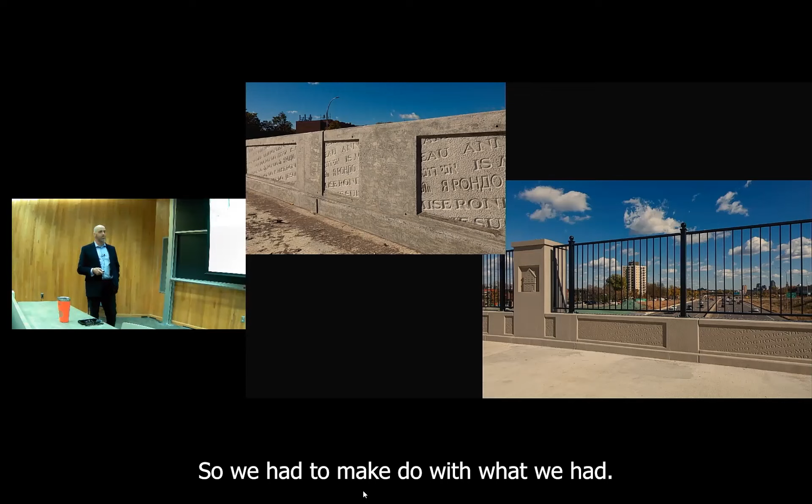That's how the houses turned out - turned out really well. There's 3 different house types in 6 different pilasters. You can see here how we did the formwork for the 'I Am Rondo' text in 13 different languages. Not a great photo, but you can see here where it's a little less prominent. Construction doesn't always go how you want, and the form for that area wasn't punched out as well as the others, but you're building 2 halves of a bridge in a year, so you don't have much time to stop - we had to make do with what we had. That's ultimately how it is now, but it turned out all right, nothing's ever perfect.

One of the things you should know - AASHTO has requirements for railings, a certain amount of force they need to withstand. When we proposed this, the natural question was, how do you know this has enough capacity? So I talked to the suppliers and they said, well, we were thinking 3/8 inch poly, and they said all NHL plexiglass in the country is 1/2 inch, and they've never had one fail due to a puck. That seemed to satisfy everyone's desire for strength, so that's actually 1/2 inch polycarbonate.

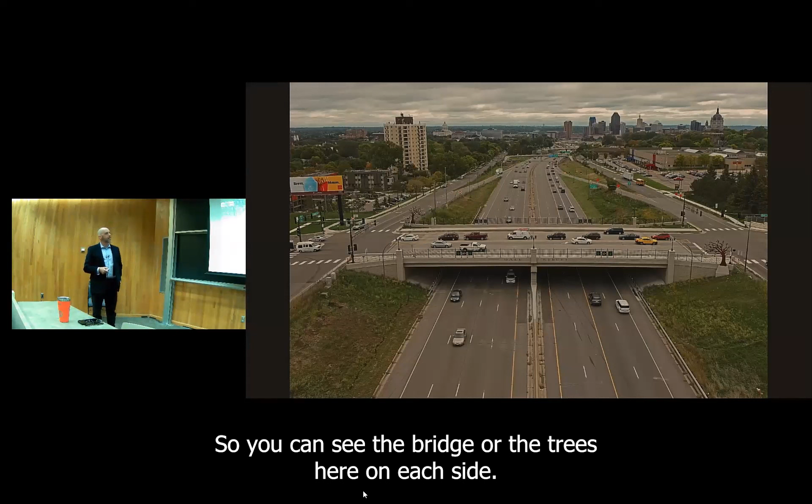That's the final product right there. You can see the bridge, the trees here on each side - this right here is along the face, the street name, Dale Street written here, and then the polycarbonate there.

That's my presentation.

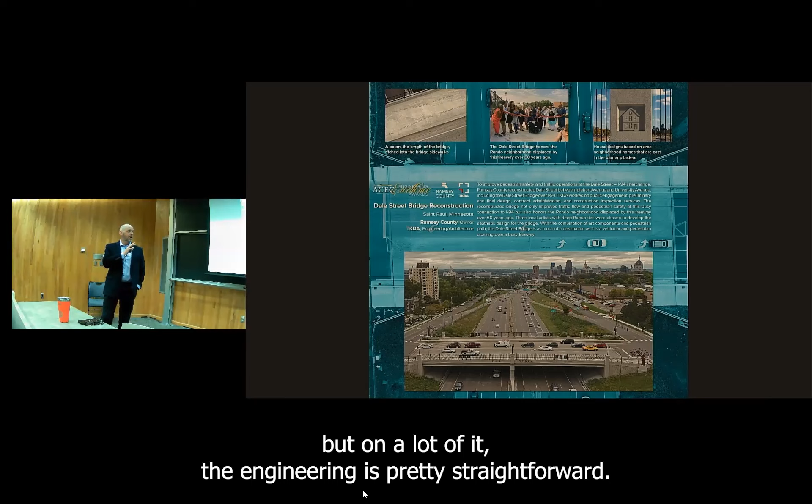So I know it's not as academic - I looked at the list of other topics you guys have, and it's really academic. What I want to point out here is that project delivery for students, especially on the transportation end, this soft side to a project is going to become a bigger and bigger component of future transportation projects. It's just going to be that way. The engineering for a lot of this is relatively straightforward - there are lots of challenging engineering problems on projects, but on a lot of it, the engineering is pretty straightforward. It's this soft side stuff that is going to become dominant in the future on how to deliver a project successfully.

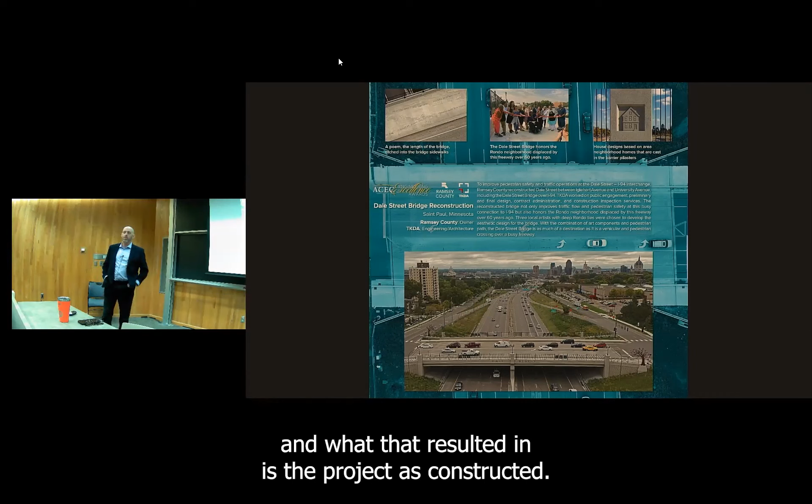The question is, how did we write the project approach in our original proposal such that we got selected, that ultimately delivered a project way different than what was initial? We had no idea, frankly, that this is how the project was going to go. Looking back, would I write it differently? Absolutely. But it required a couple of amendments along the way. Everyone was caught unprepared for the community engagement we ultimately had to do and what that resulted in for the project as constructed. But that's also pretty common.

That's a huge challenge in transportation projects, because you have an idea of a project in general of what you want to do—here we want to replace a bridge and improve the functionality of the interchange—but beyond that, you don't really know from where to where all the time, or what the features are in the project. That is very common and a challenge for owners trying to manage budget out of the gate. So one thing we recommend is that you do prelim first and stop, and then do a final design contract.

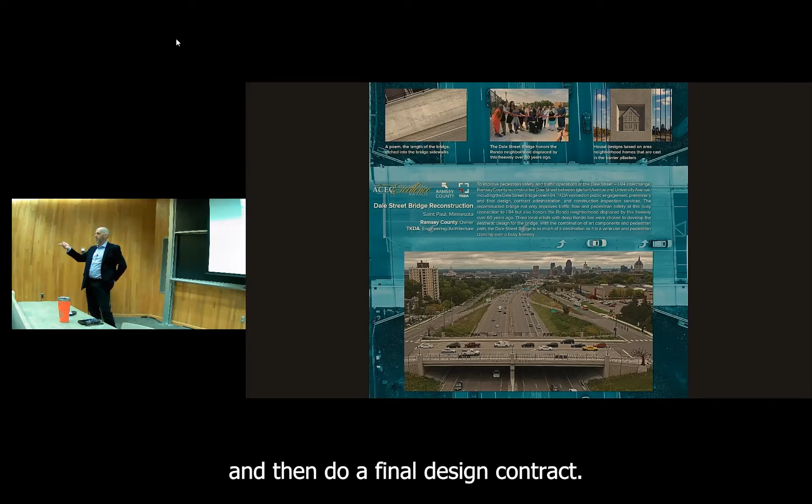Go ahead. There's kind of seeing in the future a bigger influence of this in the engineering process. How do you recommend that we train our students to be prepared for that?

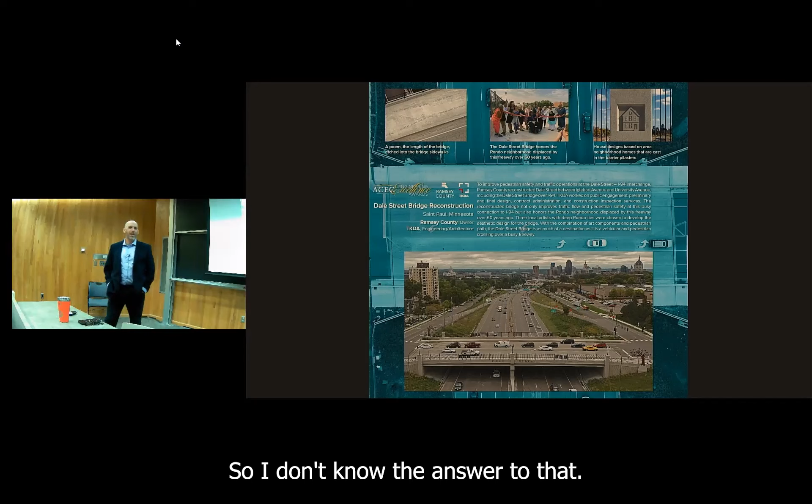The question is, I stated that in the future, the soft side to project delivery has become more dominant than it has been in the past, and how do we train our future students to prepare for that? That's a really good question, and I'm not entirely sure the answer, to be honest. A lot of it for me has been through experience. Environmental documentation is becoming a big part of it—even more, that whole NEPA process. Almost everyone I work with, both MnDOT and county and state, who specialize in that have a civil engineering background. Yet in our curriculum back in the day, we didn't have anything that focused on that. So I don't know the answer to how you would approach that.

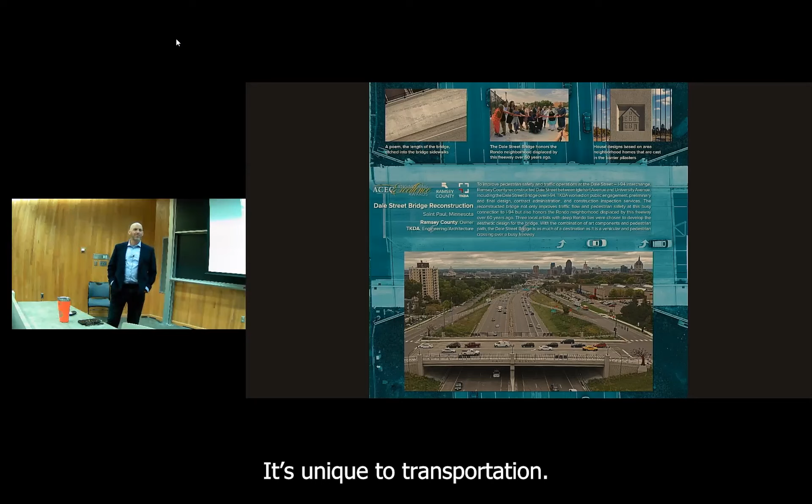That's not my area of specialty either. I'm a bridge engineer. At the end, I have folks on my team who specialize in that. So that's a challenge for you, but you'd have to coordinate with them on how to do that. It's something you're probably going to have to figure out, at least for transportation projects. My wife works on industrial projects—this isn't any part of that. It's unique to transportation.

So with this project for I-94, these transportation projects originated from a need to revamp the transportation system in the area, and then shifted a bit, like a social lens through it. Do you foresee projects in the future starting out with that sort of social lens and then having the transportation need addressed afterward?

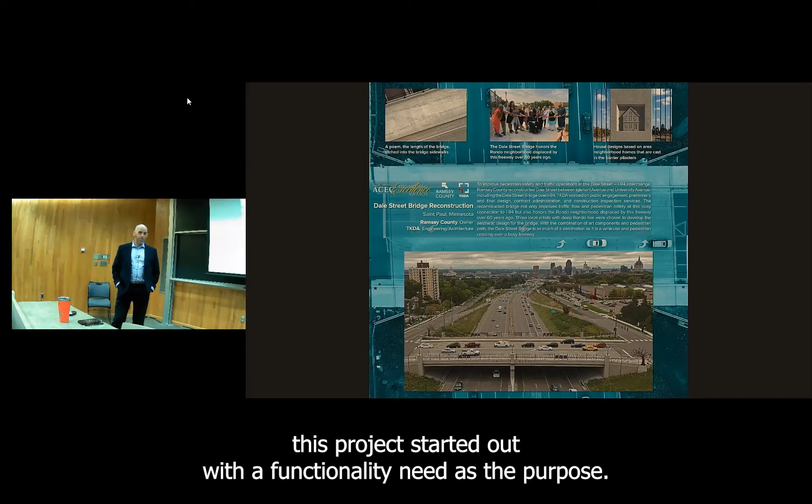The question is, this project started out with a functionality need as the purpose, but in the end a big part of the driver of the project was based on pedestrian accommodations. Do we see in the future projects that are need-based on pedestrians? The answer is actually yes, and you see a lot of that now—think about all the trails and pedestrian bridges out there, those are driven by pedestrian need and accommodations.

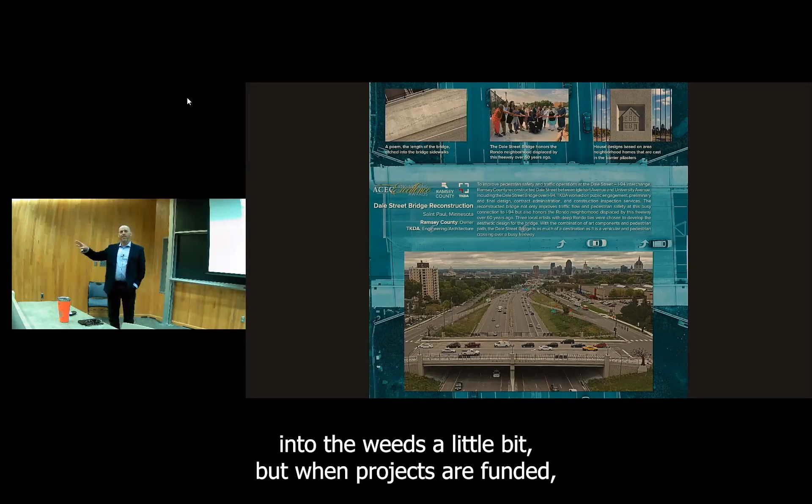Getting into the weeds a little bit, when projects are funded, a lot of times the feds give money to the state, and the Met Council distributes the money through an application process. A big part of that is the pedestrian need or the accommodations your project provides. When the interstate was built, it was all about the utility of moving traffic. Now, one of the sole things about it is how you're making it better for pedestrians, bicycles, and mass transit. So, yeah, thank you.